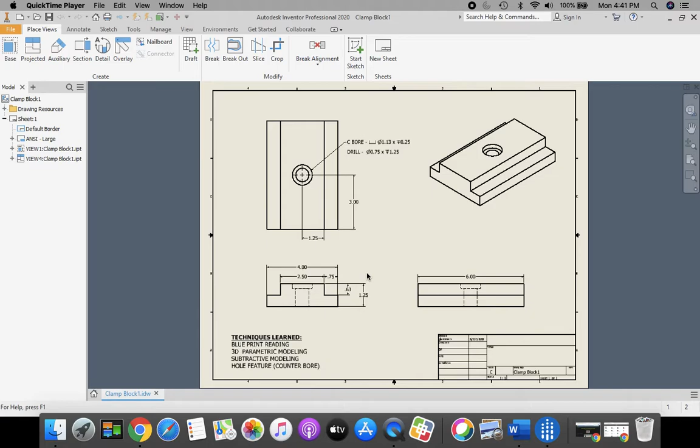To start, we're going to go from our fresh Inventor. We're going to come up to the top and go New from the ribbon bar, and we're going to create a standard.idw. This one right here, standard.idw, and click Create.

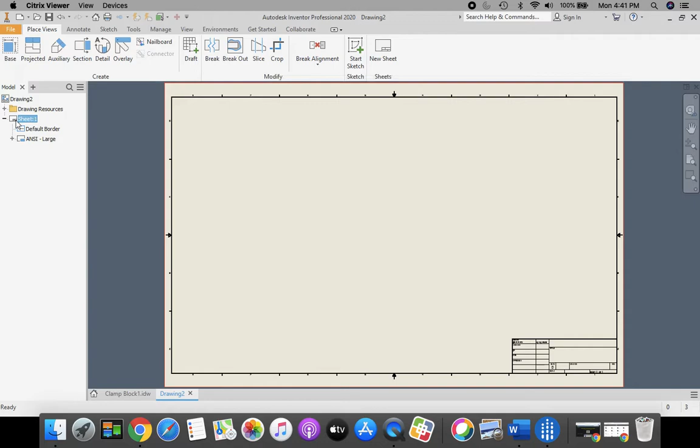Now the first thing we need to do is change our sheet size. Right now our sheet size is a D, we need to change it to a C size. We're going to come over to the model browser on the left hand side where it says Sheet 1, right click, and go to Edit Sheet. Once we're in Edit Sheet, we're going to change our size from D to C and click OK. That's the proper size sheet for us.

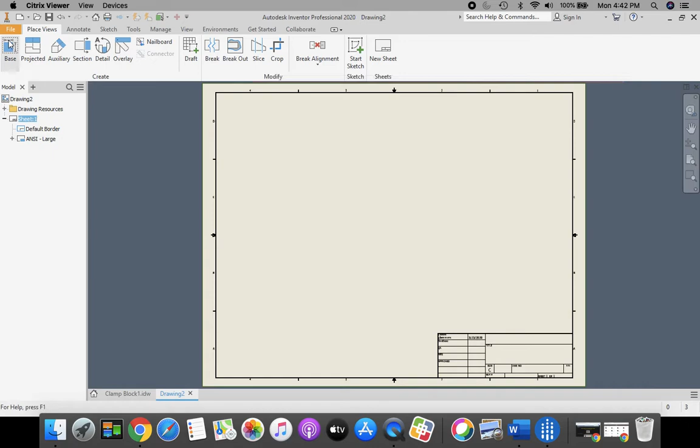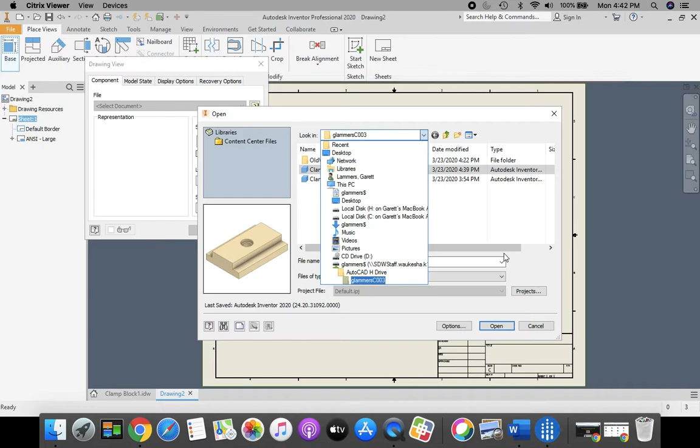Next, we're going to go up to our ribbon bar and go to Base, then go to this folder right here with the magnifying glass, and we're going to choose our clamp block. It should automatically select your H drive, but if not, click on this pull down arrow, scroll all the way down to your H drive, first initial last name C003, the gray box with the green line underneath it. Select your clamp block and click Open. Once we did that, we're going to click OK to select.

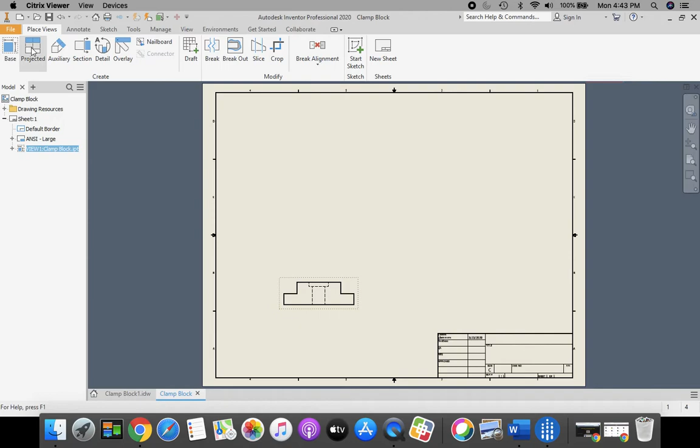Now we're going to take our cursor and bring our mouse over to the part. When it highlights with that red dotted line box going around it, we're going to click and move this to the lower left hand corner, somewhere around here. Then we're going to come up to our top ribbon bar, click Project, come up to the top, click, come over to the right hand side to get our right hand side view, click, and get our pictorial isometric up here in the upper right hand corner, click. Once you've clicked those three views, right click and create.

Now let's talk about dimensioning. We're going to come over to our ribbon bar, and above us there is Place Views and Annotate. We want to go to Annotate, and on here we're going to place a few dimensions. We're going to dimension this top red line, bring it up.

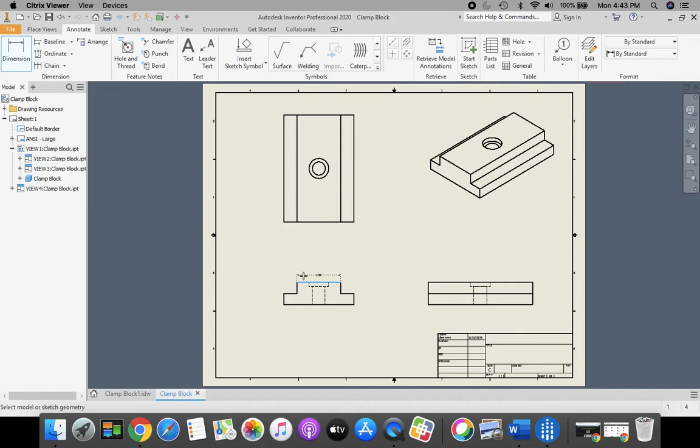We're going to dimension this line right here, bring that line up. We want the overall width of this block, so to get that I can select my bottom line and bring this up, or I can click the top left corner, the top right corner when I get the green dot, and bring that dimension up. Both of those are fine.

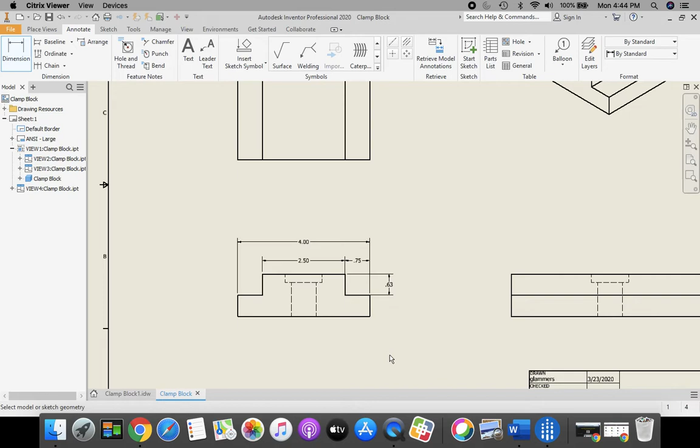I also want my side dimensions on here, so I'm going to click this top part. I want the overall dimension, and for this one I have to take the top line and the bottom line in order to bring this dimension out to the side. For our side view, this is what shows us our depth. We're going to bring that dimension up.

On our top view here, we're going to take a dimension from the inside part of our cut to the center of our circle. Bring this down, and we're also going to dimension from the bottom of our part to the center of our circle.

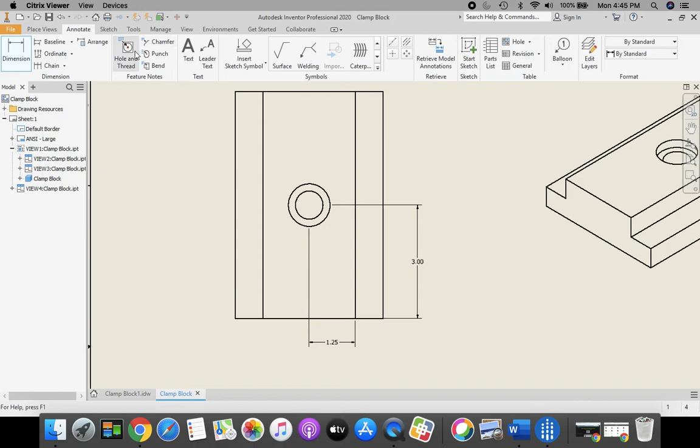The last thing we have is we have to specify this counter bore. We're going to come up to the top, and instead of the dimension tool, we're going to use the hole and thread tool. Select that, and then I'm going to come over to my hole, click, and just bring this dimension up. It automatically puts all the dimensions in there for me. That's pretty nice.

Now we're going to save this. Go up to the orange file in the top left hand corner, click File, go down to Save As. We want to put this into our H drive, first initial last name C003. If it doesn't automatically come up, click on this pull down menu and select your first initial last name C003, the gray box with the green line underneath it. I'm calling it clamp block, that stays the same, and click Save.

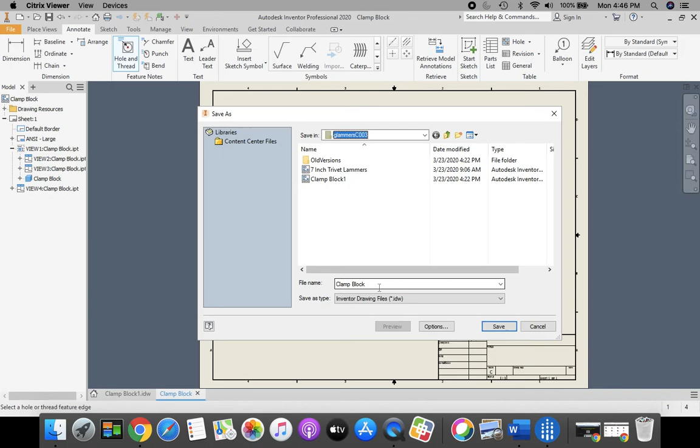Now we need to prepare it in order to get it placed into Google Classroom. We're going to go up to the top, go to File, we're going to export, export PDF. We're going to make sure this is going to our H drive, first initial last name C003. The file name clamp block is still fine, and click Save.